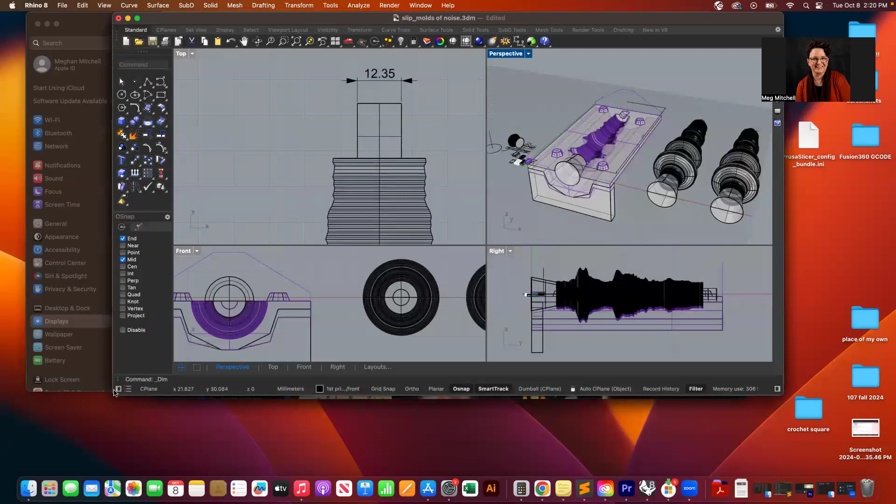I'm using Rhino 8, and I committed the sort of very common error of trying to use Rhino without connecting to Global Protect first. Wah, wah. But it's just one of those things.

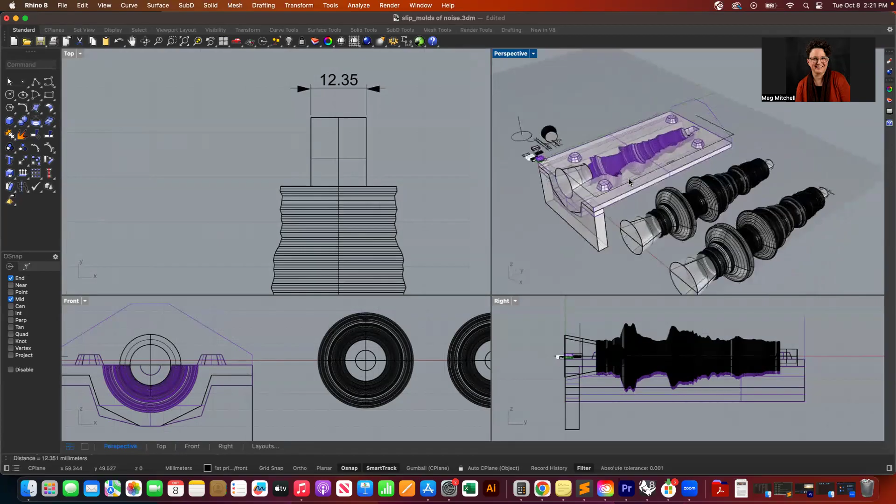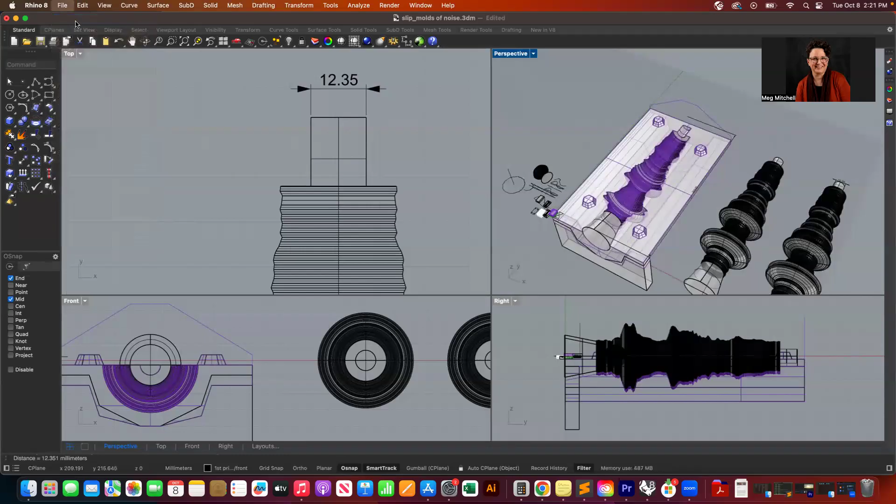So this is a file I'm working on in my own research, and I thought it would be a really good way to talk about how to get started with a 3D print. It's not really important what this is, because what I'm trying to do is make these forms so that I can snap them together. So today we're going to work on a couple of scale tests of this snapping part. Literally, we're going to make a box with a hole in it, and a piece that can slide into that hole. It should be fairly simple and basic. I can definitely do more demos on how to use Rhino in 3D. Most of you probably know about my YouTube channel, which might also be a good way to get some practice with Rhino. I have a playlist of about 7 videos with Rhino 7.

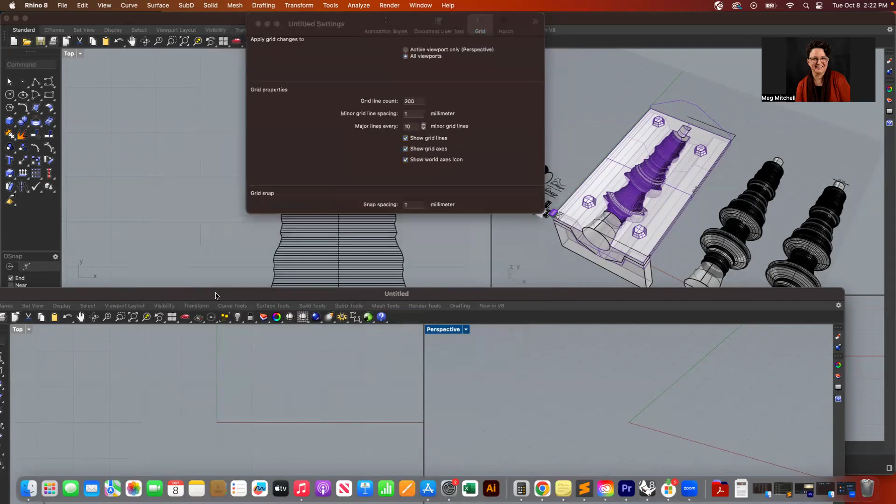So I just opened up a new document. The first thing I want to do is go to my settings. I'm going to work in millimeters, keeping in mind that the object I want to work with is about 12 millimeters wide, so I don't need hundreds of millimeters of space on the grid - just a pretty small grid. I think making the minor grid line spacing every millimeter should be okay, with major lines at every 10 minor grid lines. That seems completely fine to me.

I'm also going to check my units, making sure both are in millimeters, and they are. In general, 3D printing software really likes millimeters. It will print objects in inches, but it's possible you may have to do a conversion. If you designed your object in millimeters and want it in inches, you usually multiply or divide by 25.4 depending on which direction you're going. That's the magical conversion number. My advice for 3D printing is just to work in millimeters because it's easier.

This is really all we need to do to the grid at this point. As I'm doing this, I may change the grid a little bit to accommodate finer spacing. It looks like my snap spacing is at 1 millimeter, and for this project I think it might make more sense to adjust it, but it's fine - we'll change it later if we need to. Okay, I'm just going to go ahead and save this with a name. I called it 3D snap test.

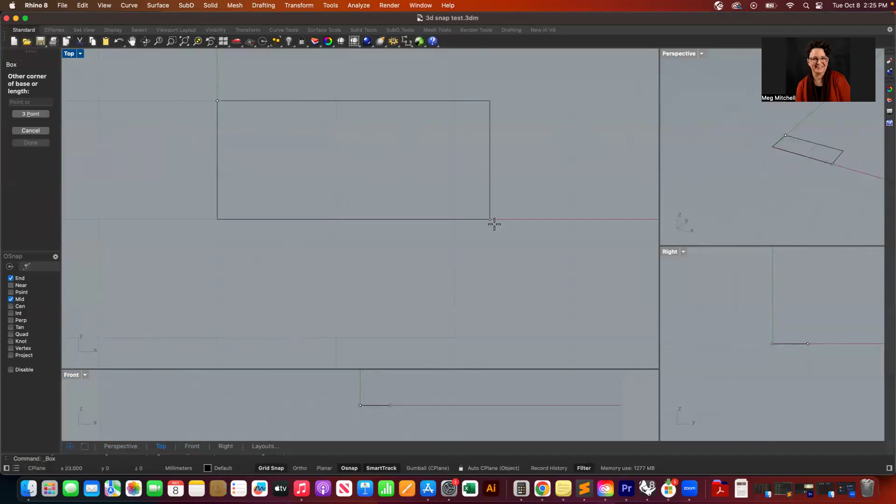So I'm going to start by making two forms. One I'll make while working in the top view, since I like that a bit more. I'm going to use the box form and make a box that's roughly 20 by 30 millimeters. To do that, I need to turn on grid snap, which was the whole point of spacing out the grid. I'm going to make that box about 20 by 30, and then probably about 15 millimeters up. I eyeballed it, but you could certainly type in 15 if you want to be precise.

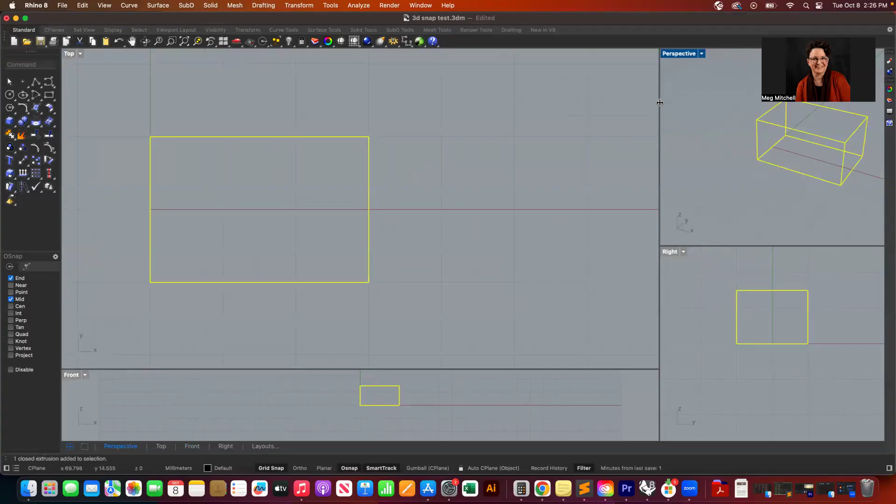I've got this box, and I'm going to show you another way to make a box, because we'll need a couple of little boxes for holes and rods at different sizes. Another way to make a box in Rhino is to start from the curve. What we did here is make a shape primitive using the box command - going directly to a solid box. If you start with a curve, there's a more complicated process and some things can potentially go wrong. The nice thing about using shape primitives is that they are guaranteed to be watertight. I'll have to show you a model that is not watertight in order to drive that home.

So when we make the second box, we're going to make it in a way that is basically wrong, or in a way that won't print. And then I'll fix it and I'll show you the difference.

Okay, so to start our box, I'm just going to do the same thing I did before, which is make a 20 by 30 rectangle using the rectangle command. And I think here I would go ahead and go to the surface menu and extrude curve straight. And then I can extrude it to the top level here.

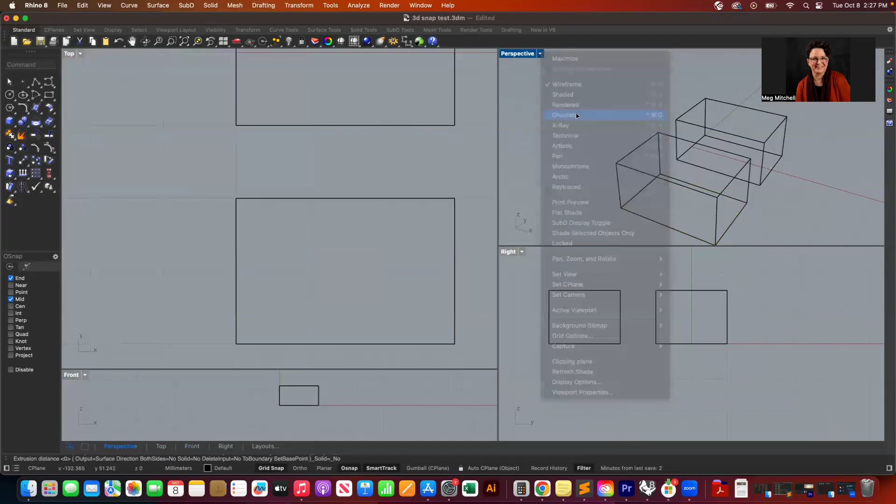Now I'm going to turn on my rendering in my perspective view so we can get an idea of what's happening. My personal favorite view when I'm using Rhino is to use the ghosted view, because you can kind of see what's inside things in case things have gone terribly wrong. You could just as easily use the shaded view, but for me, seeing a little bit of that interior is really helpful.

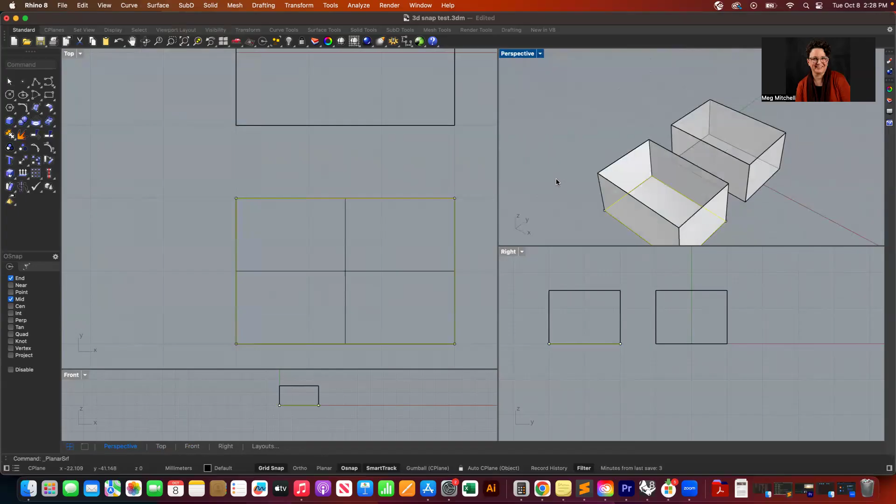So basically what you can see is that we took that curve and we extruded it into a surface, right? So it would be fairly easy to fill the bottom by making a surface that conforms to this curve. And that's over here in the surface menu, the surface list called planar curves. So this is indeed a planar curve, and it can just have a surface constructed around it.

Now I want to show you, first of all, which of these models is 3D printable and which is not. Yeah, the one that is fully filled in on all 6 sides is 3D printable. This, if you fed this to a 3D printer, it would literally print nothing, because the surfaces have no mass, and they are not what is called a watertight shell.

So now you may be asking, well, what if I wanted to print an open box like that? I would say, okay, we'll talk about that in a second, maybe after I do my rod things. But for now, I also want to show you another sort of way of making this not quite right.

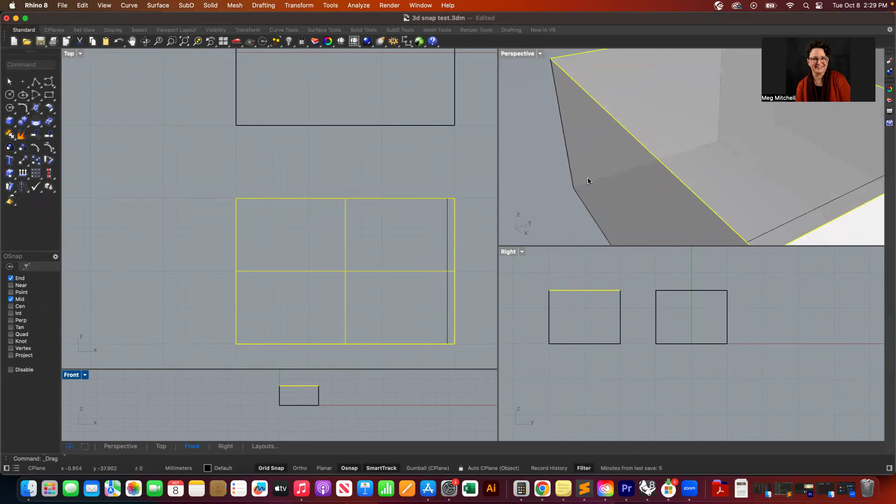And that would be, let's make a rectangle that goes from here to, let's say, here. And I'm just going to raise it up to the level of the other ones. Oh, I moved the wrong rectangle. Sorry. Move the right one. Okay, so now I'm going to fill in that surface by using the planar curves method.

Is this object 3D printable now? It is not. It's not. So this is basically an object that is like most of the way there, but it's not watertight.

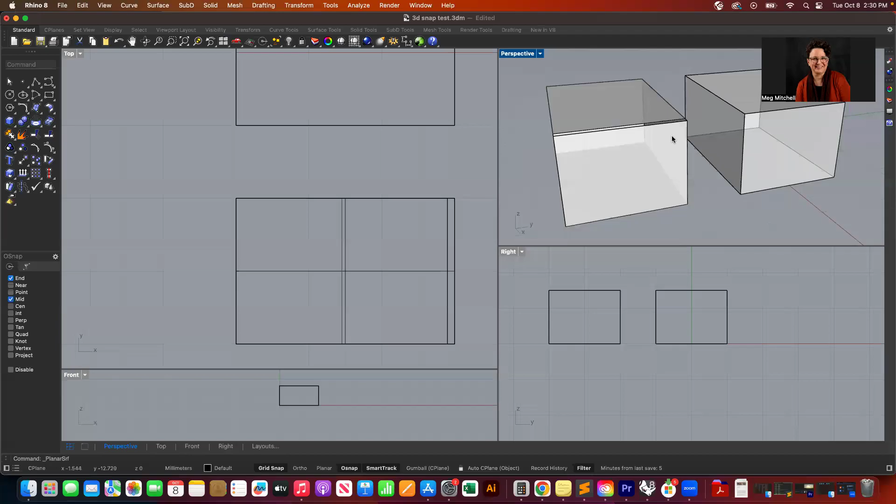Now, I think in this case, it's really obvious that it's not watertight, right? Because I made that gap pretty large. Where you run into trouble with Rhino is that this lack of water tightness can sometimes be beyond the seeing eye. Like it's so close that only the exporter can tell you that it's not watertight.

And so if you're having problems with water tightness, I will say a few things. Use your snaps. That is the best way to ensure in Rhino that things are watertight. If you're expecting to move something to another node or another line and you're not using a snap, I can almost guarantee you that that form will not be watertight. So definitely using the snaps and making sure that everything snaps together is the number 1 way that you can make things watertight. So this is easy enough to fix, actually.

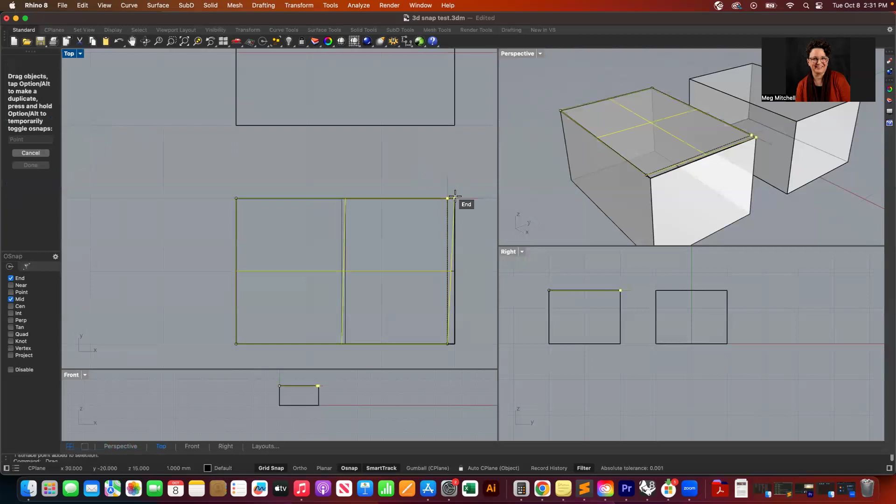I can just take this surface and turn on the edit nodes here. Where is that? It's right here, control points. And I can basically just take one of these points and move it over here, and take another one of these points. I could even move them both at the same time if I wanted to be really fancy. And there, now our model's fixed. So that's pretty much what it takes there.

So I'm going to go ahead and still keep using these two boxes. They're basically identical, but at this point, I'm hoping to have some forms that create holes inside of them.

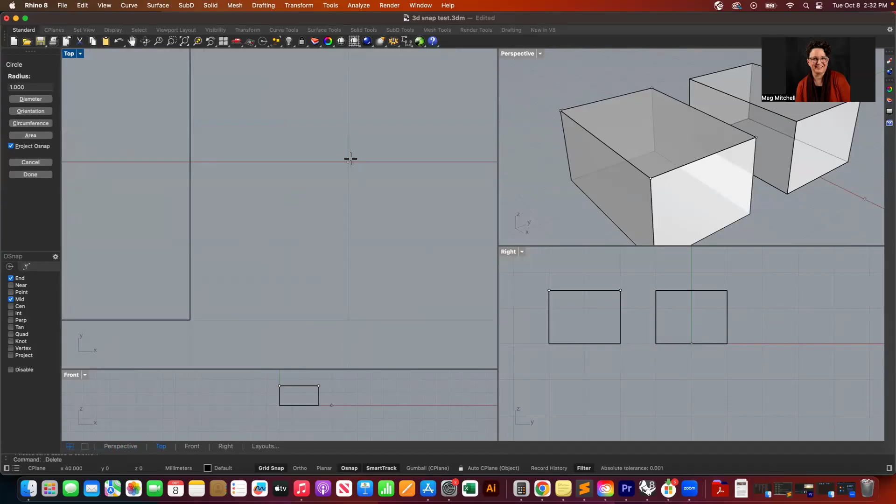And so I think what I'm going to do there is go ahead and make a cylinder. And I'm going to make it, let's see, I think I'm going to make it 6 millimeters to start. And I can certainly now extrude it to give it some height. So I can go up here to solid, extrude planar curve straight, and just give it some height. I want it to be a little taller than the box. And then I can just move it into the box.

I think I'm also going to take this 6 millimeter object. The issue with this kind of thing in 3D printing is if I print the rod at exactly 6 millimeters and put it into a hole that's exactly 6 millimeters, it's not going to work. It'll just bonk and won't go through. There's a tolerance issue because the 3D printer isn't accurate to the thousandth of an inch or whatever.

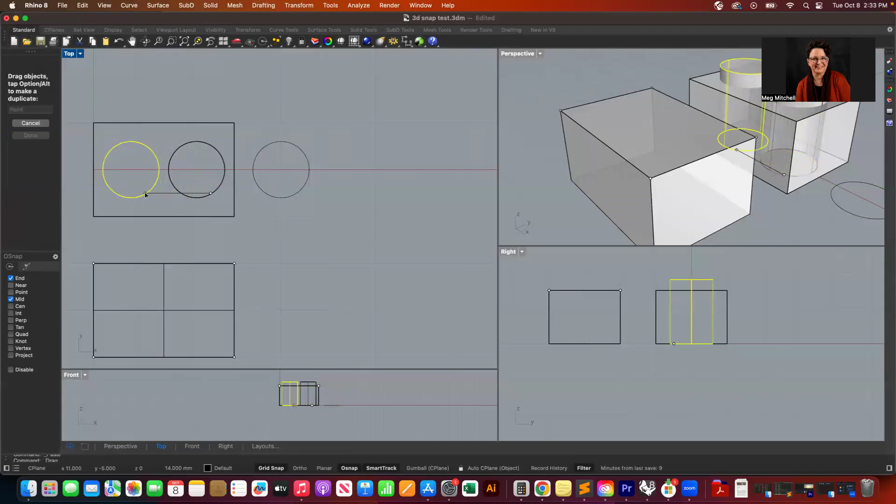So for that, I'm going to take this 6 millimeter rod and move it so that it's in a couple of different places.

We have to basically make our hole a tiny bit bigger. So I'm going to make a cutting object here that's a little bit larger, another cylinder in basically the same place as the old cylinder, but in a couple different sizes. This one is 6.7 millimeters.

I'm hoping that will be the largest amount of tolerance, but I think I could make one that's also like a half step between, so I'll go ahead and make yet another circle.

This is where I thought maybe my snaps needed to be a little more nuanced, but I think I can get away with doing a midpoint here. Whoops, excuse me, that didn't work out so well. If you're having trouble using your snaps, like right now it's not 100% snapping to the midpoint because it's too focused on this endpoint. So I could turn the endpoint snap off, and that kind of forces the issue.

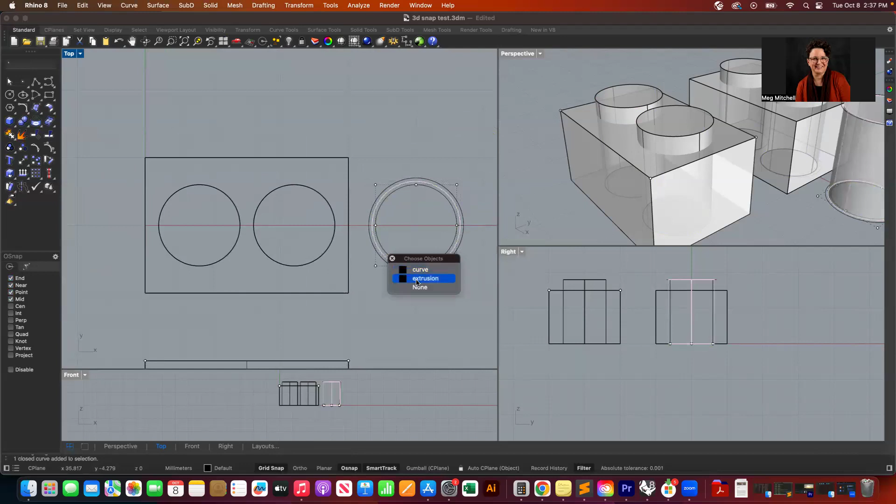Actually I got a tiny bit turned around just now. Hang on, okay. So this is our first form. I actually want the extrusion, not the curve. I'm going to hold the shift key down because I'd really like to move this in a full ortho mode here.

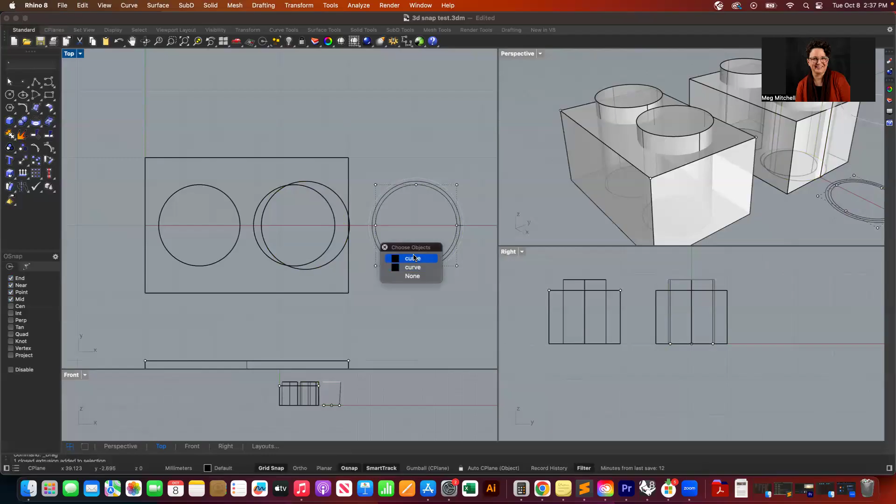As you can see, it's kind of snapping back and forth, so we can fix that later, but I want to go ahead and get these moved into place. This one needs to be extruded, so we can extrude this one down. Yay, and now I can move this extrusion over here.

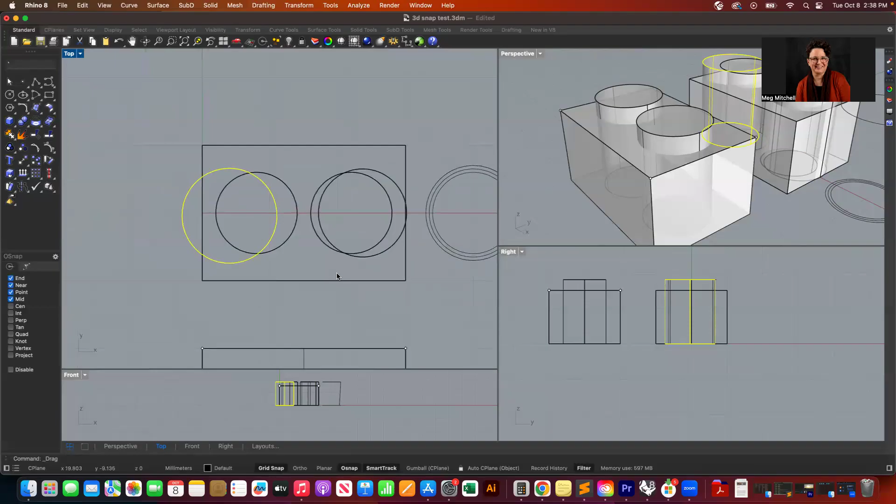I'm just putting them in place so I have some idea of where they can go. Then I'm going to use the actual move command to precisely move them over the other ellipses. So here, I'm going to take this one, use the move command, and activate the center option, trying to move it from center to center.

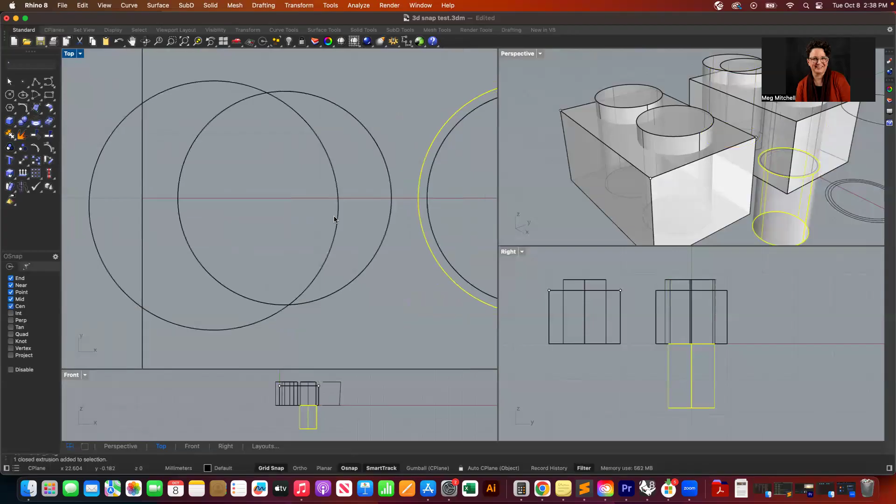I think that's exactly where it should go. I'll do the same thing with the other one, again with my center snap activated, so I can go to the move command, pick up the center of the large one, and then move it over the center of the little one.

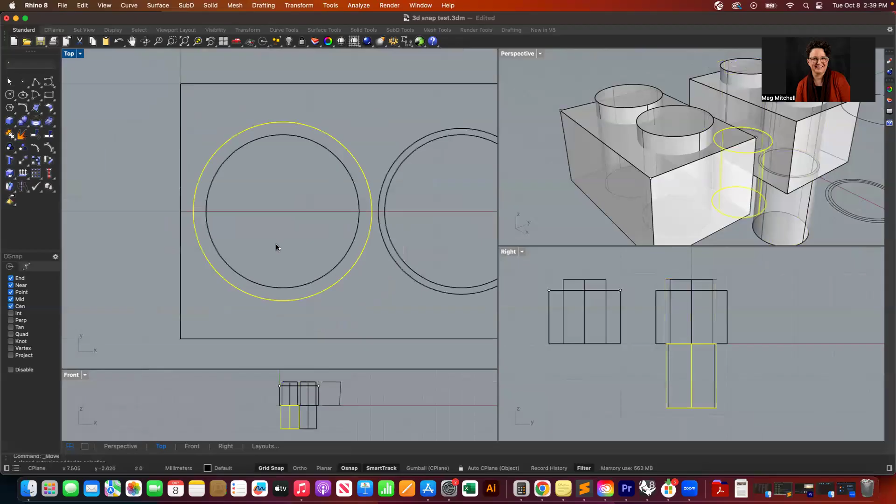Yay, okay, so now what does that look like? Right now it looks like I have to adjust them a little bit in the Z dimension. This would be a good opportunity to use the layers palette, because these rods right now are purely decorative — they're just there to be there. I don't know exactly why, I think they were there mostly just for placement.

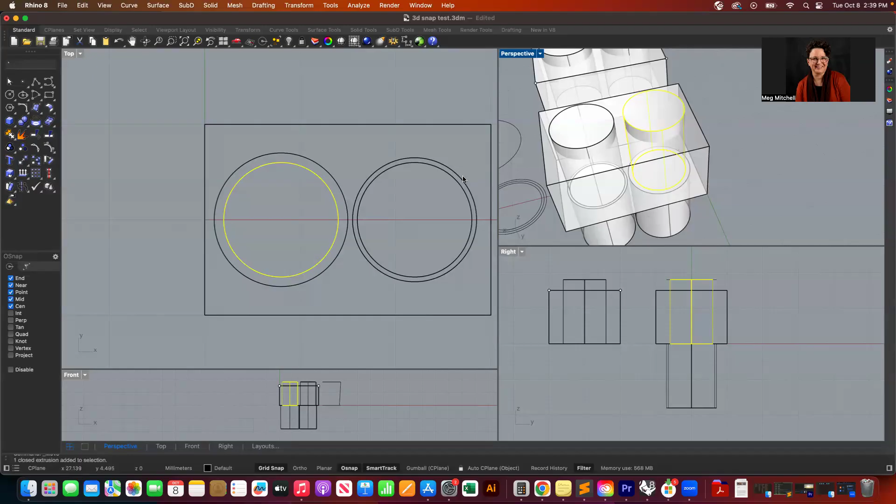So I don't really need them right now, and they're not really helping because the holes are going to be these larger curves. Also, just for the sake of time, I'm probably going to stick to these two and see how that turns out, and then I can do the rest on my own.

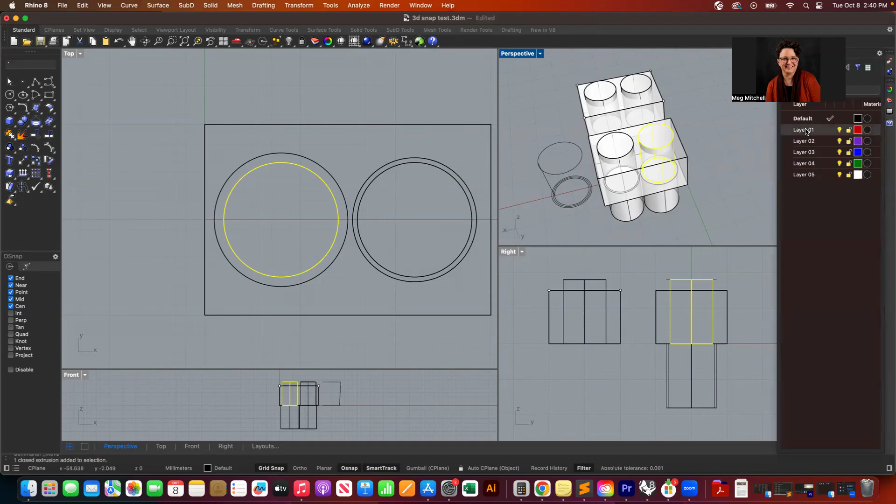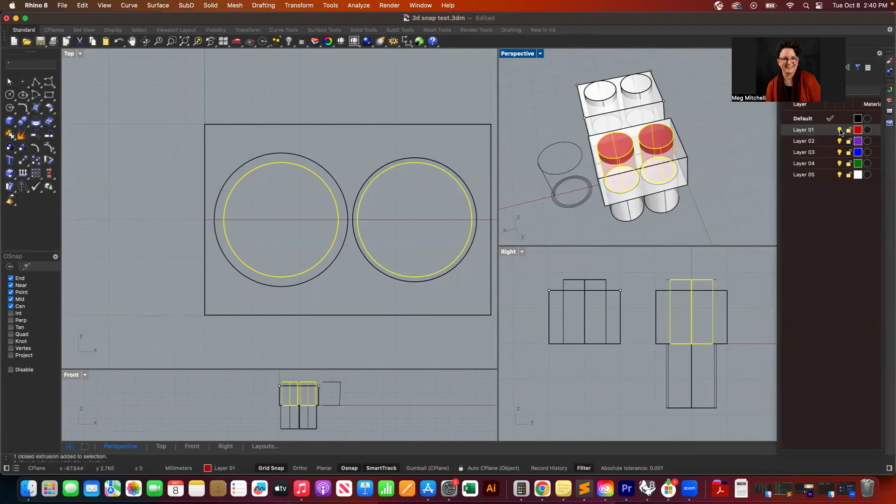So I'm going to bring up the layers, and I'm a huge fan of using layers in Rhino. I think it's a great way to sort of get rid of stuff but keep it where you need it. So I'm going to select these two things, go to a new layer, right click or control click, and do change object layer, which is basically going to put these guys on the red layer, and then I can get rid of them.

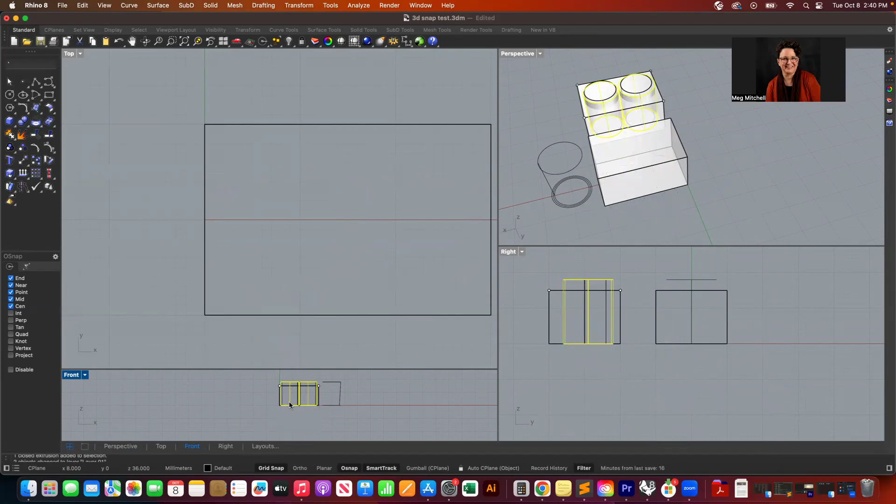Now, I do need to take these two hole objects and pop them up to the level of the other ones. Hopefully I can do that without moving them in the XY dimension.

Another thing I'm going to do, just because they're kind of interfering with my snaps, is get rid of these two for sake of simplicity. That'll make these easier to move into the proper place. Now if I hit shift, it will keep it in ortho mode, which is ideal because I don't want these to shift in the XY dimension, since I just took great care to place them in a certain spot.

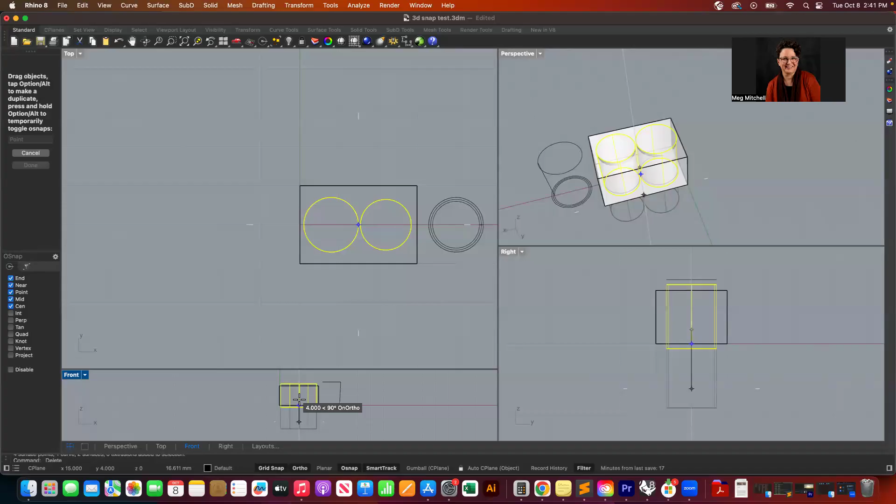Okay, so now I want you to notice that I'm moving these forms so that they overlap both sides of the box. You could have them flush to one side of the box and still make a hole, but it works better if it fully contacts the box. Okay, so I'm basically good now.

Now what I want to do here is take these forms and subtract them from the box. So in Rhino, there's a set of operations called Boolean operations. Basically, you can take one shape and subtract another shape from that shape.

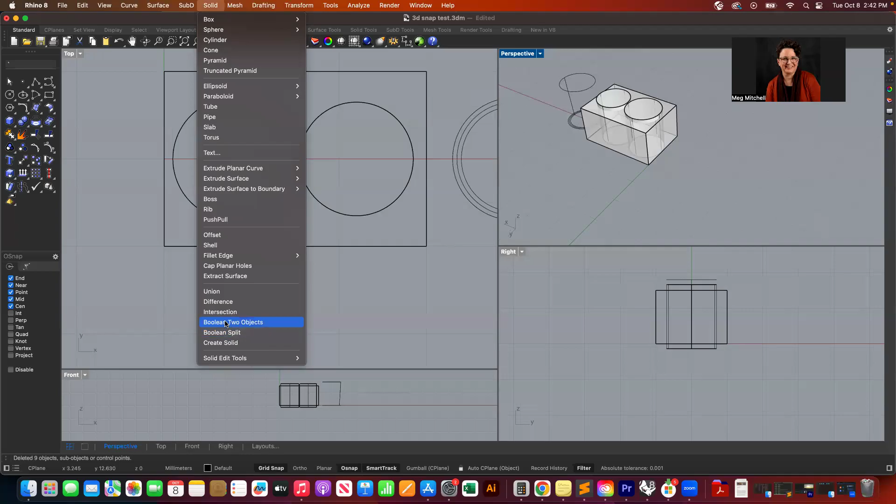So I think what I'll do here is go to the solid menu and Boolean two objects. I personally like the Boolean two objects function because it lets you browse through all the ways of subtracting or intersecting rather than having to just pick one. There are some reasons you would choose these other methods, but they're sort of encompassed in the Boolean two objects method. So here it says select two objects to Boolean.

So that would be the box and let's say hole one. You just click until you get the result you want. It'll show you a couple different ways of subtracting or adding these objects together. And then you hit enter. And so now you can see we have a fully holed out hole.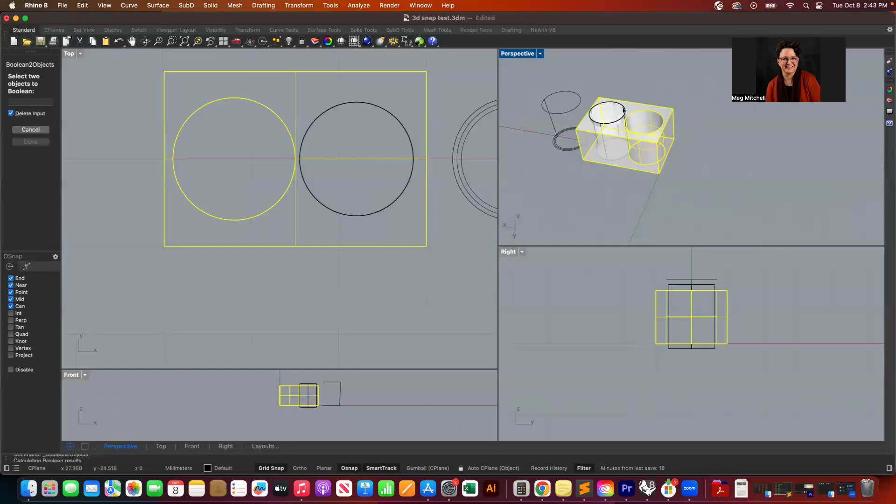And then we can certainly do it again for the other hole. So in Rhino, a good hack: if you hit enter, it will bring up the last command you used. So if you're doing something repetitively over and over again, hitting enter is a super easy thing. So I'm going to select these two objects and click through my options. Yay, thank you.

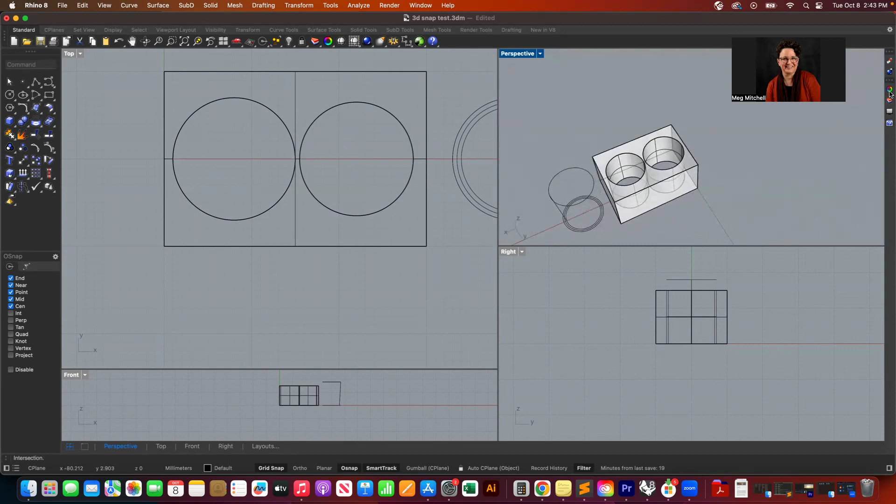If I were doing this on my own, I might consider making this have a little bit more real estate here. This is going to be a little thin, but it'll be fine. It'll definitely print just fine. And I'm going to go ahead and bring my rods back into the mix.

So basically, right now, we could 3D print this, and it would print as one model but three separate objects. And I think that's what we're going to do. Can I guarantee that these rods are going to slide around in these holes? No, I can't. I mean, it's a test. But that's the kind of testing you have to do if you want stuff to fit together.

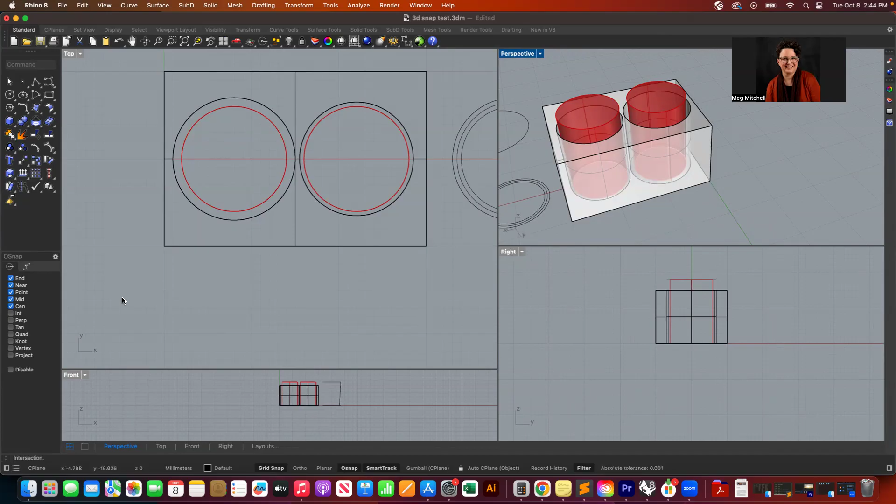So I did want to show you one other thing in Rhino that might be kind of useful, and that is the shell command. So if, let's say, you wanted to print a box that was hollow, I'm just going to bring back our old box from before. You can certainly do that.

So there is a command in Rhino called the shell command, and I'm actually not sure where it is - I always just type it into the command line. It's called shell, so if you type the word shell, it'll come up. Then it says, okay, select a face to remove. This thickness parameter is the wall thickness that you're going to get.

So we might actually want to go for something a little thinner, like maybe 0.5. That would be really slick.

Elena, what's the thinnest wall thickness you would do? I would say probably the thinnest wall thickness you could reasonably do. At a certain point, the printer just isn't going to be able to print it. I would say like 0.2 millimeters, whatever your layer height is, is what I would make your thinnest wall. Right, because the printer has a nozzle that's a certain size, so you definitely can't go less than that. It really depends on what you're printing.

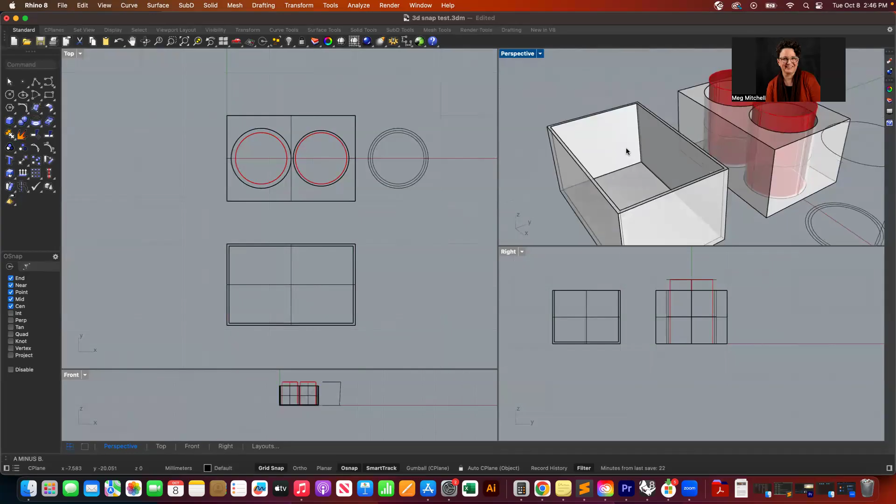So this has been shelled out now, and this form is completely 3D printable because it has a solid surface that goes all around it. So that surface-to-surface thickness can be quite thin, but there is a practical limit.

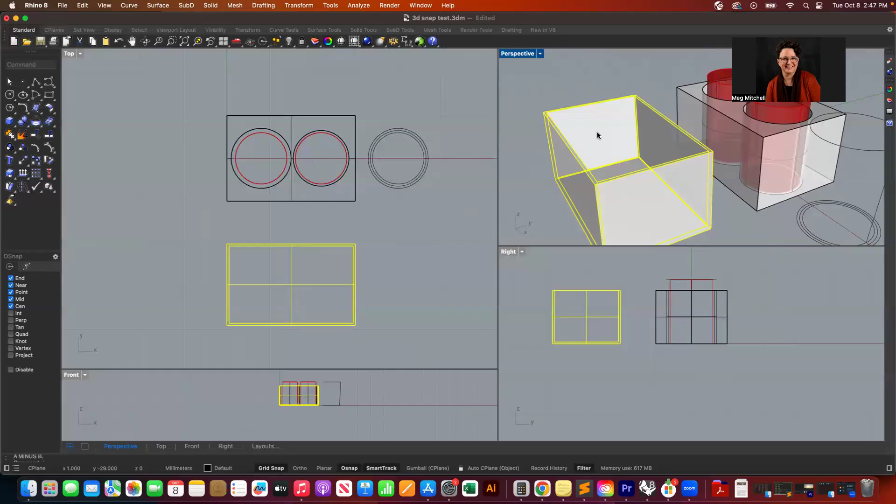Awesome. So now I'm going to show you how to export this and get it into Prusa Slicer. Before I abandon this model, I'm going to do a tiny bit of housekeeping.

I'm going to take these curves that I had made before, select them, and this is something I do repetitively in my own work. I make a layer called curves, and I just throw stuff on it by doing a change object layer, and then I even make it invisible. I mostly just store those curves in my Rhino file, because if I go to make the surface a different size or whatever, they're there and I can use them again.

I don't like doing things twice. So now we've got some objects on the screen. Let's say I wanted to have these three objects be my 3D print. It's pretty typical when I work in Rhino for 3D printing that I have a ton of stuff on the file, but I just want to 3D print this one thing. So there is an export selected function in Rhino, which is super helpful.

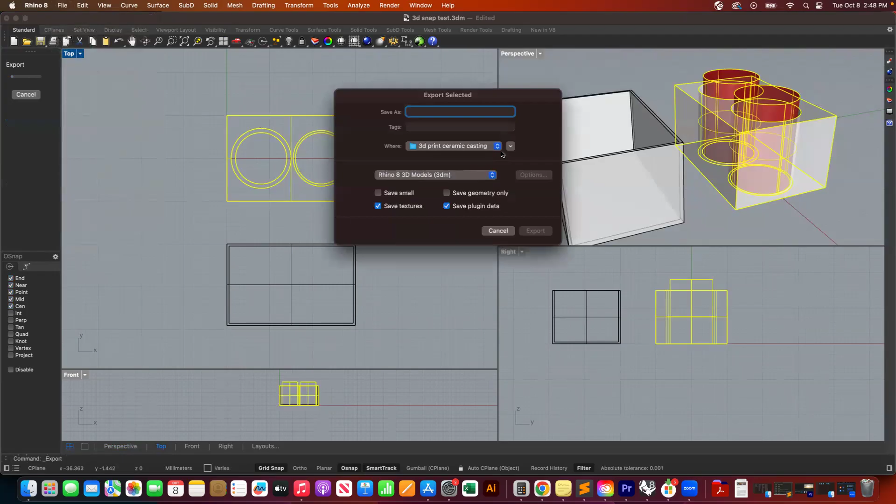You can go straight to that. So I'm going to save this in my class folder, and I'm going to export it as an STL.

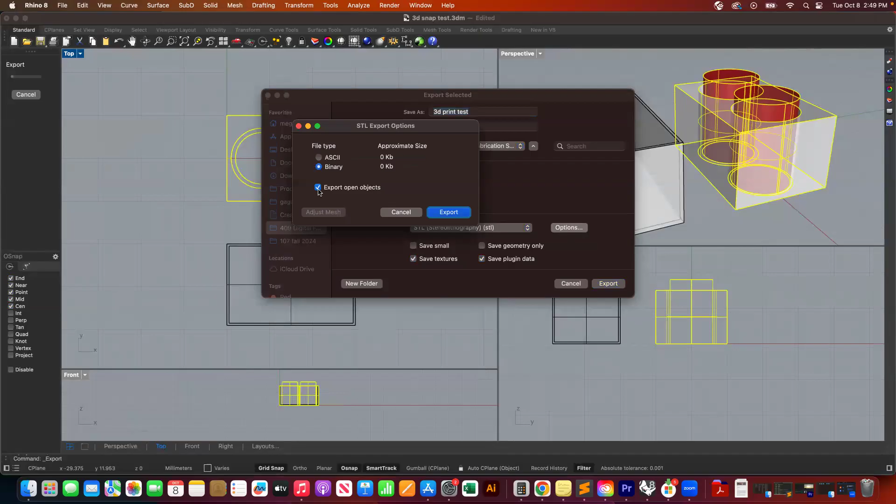Now there's an options palette here. Honestly, I don't think any of this matters much, but you probably want to have this box checked that says export open objects. The only reason I say that is you might think, oh, that's bad to export open objects because they're not 3D printable. Well, they might be — 3D printing software has gotten a little more forgiving over the years, and sometimes you can get it to work. So I just enable that, so if there's some teeny tiny problem, sometimes the software will just gloss over it.

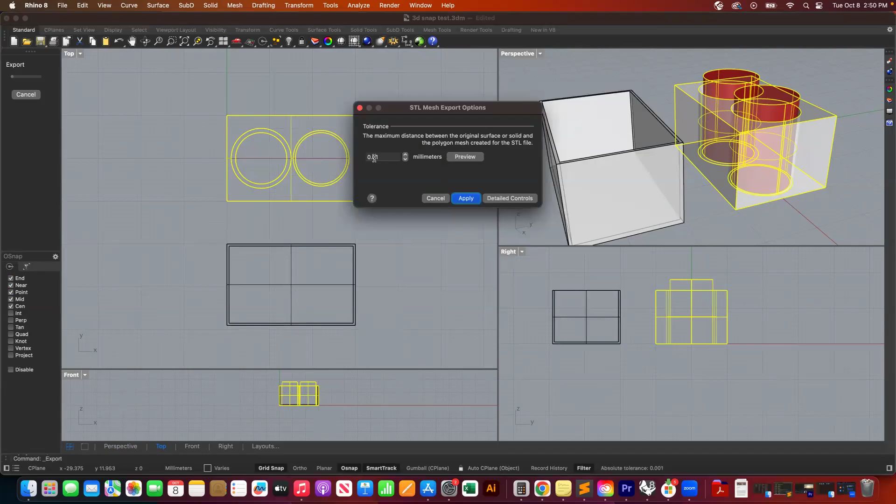So then you can export. There's a setting here for tolerance. Certainly if you're working on an engineering project and need a certain tolerance, I'd be mindful of that, but for general purpose 3D printing, this is way more than you probably need — it's like 1/100th of a millimeter. If you worked at 1/1000th of a millimeter, it would just increase your file size. I don't feel like 3D printers are capable of representing that level of precision, so you're just wasting hard drive space.

So you can go ahead and click apply and then finish the export.

Okay, first I'm going to preview my STL file. I might have told you all about this program called MeshLab — if you just Google it, you can download it. It's a free polygon mesh viewer, and it's really great for checking out 3D models before you print them. You can actually do some things to it if you're using a 3D scanner; it's really great for 3D scanner data, so it's definitely something to think about.

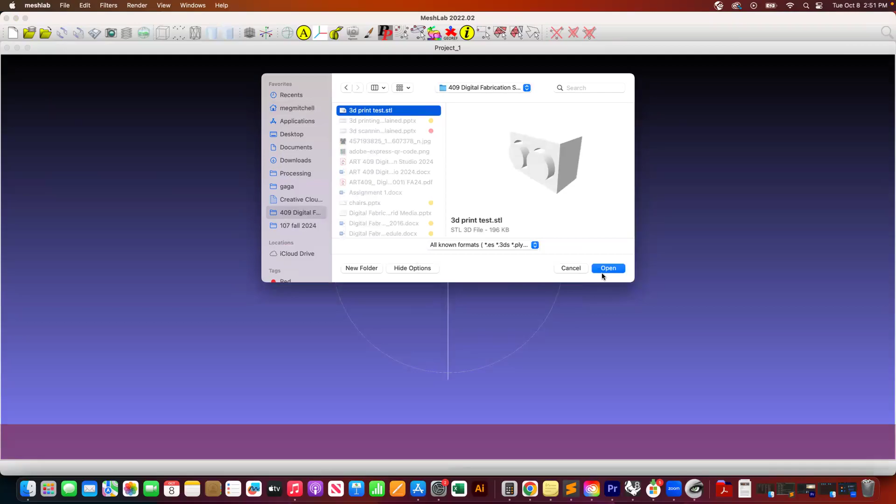So I'm going to import the mesh. Where did it go? There it is. Just go for the defaults there. And so as promised, we can kind of see our little test here.

MeshLab is really, the reason I like to use it is because — is that Aaron McAdams? Oh, hi. Hi.

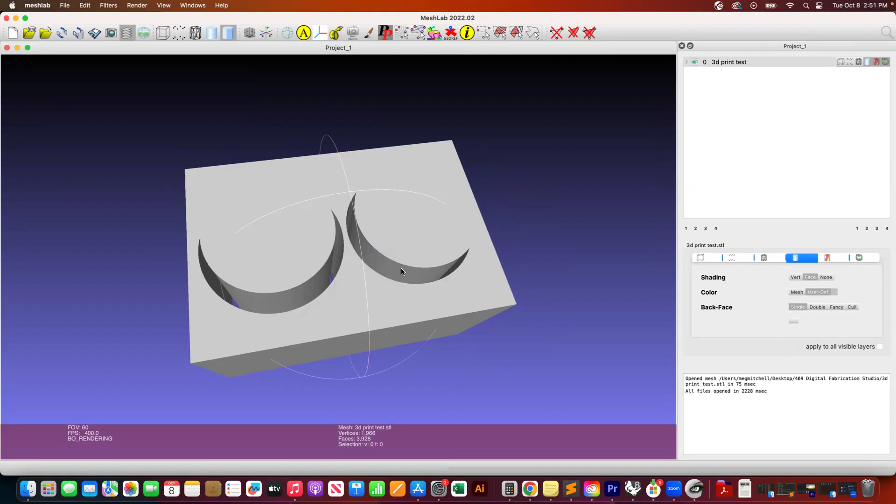The reason I like to use MeshLab is that if you've got a bunch of 3D printing models, Rhino takes forever to start up, but MeshLab is like, hello, I'm here, I'm going to show you your model — it's light and easy. So anyway, I'm basically verifying that it exported correctly and that all of its holes are in the right place, blah blah blah. So now I can exit out of this.

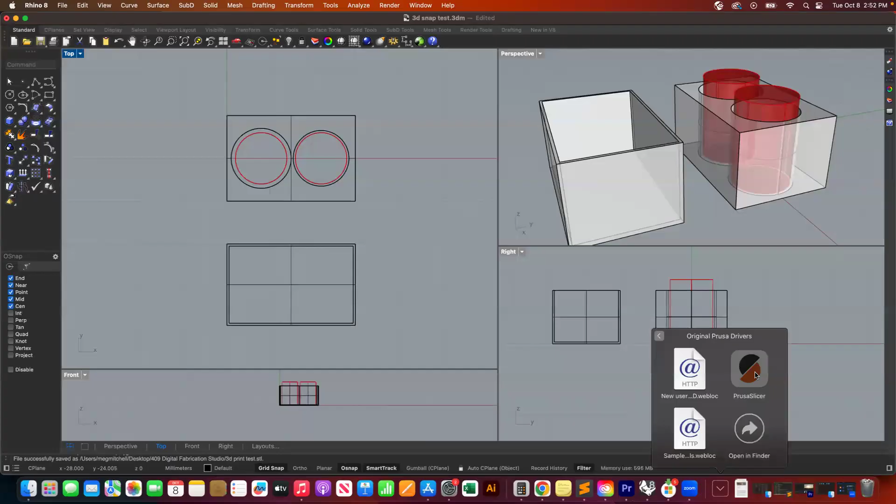Now I'm going to open up Prusa Slicer, which is basically what we are going to use in this class to get us from a 3D model to instructions for the 3D printer. So when you start Prusa Slicer, go ahead and maximize it here — maybe not that much, sorry, hang on.

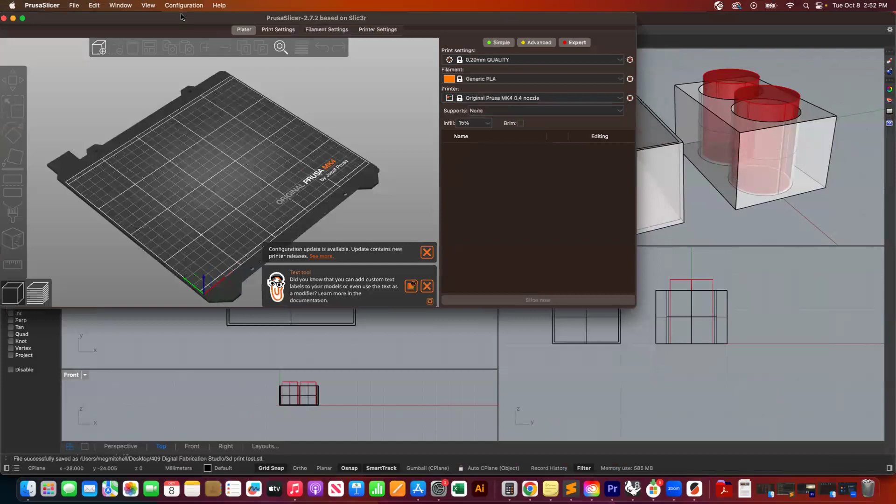Okay, so basically when you open up Prusa Slicer, you get this. And I think from here, you can add a model. So I'm going to go ahead and just find my little model here.

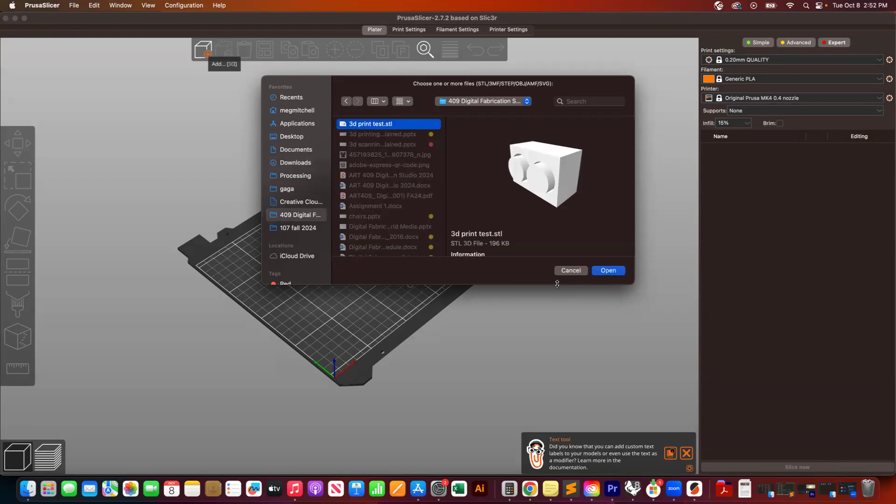It actually brought it in the correct orientation, which is kind of surprising. It usually doesn't. But the best way to change the orientation is through these rotate tools. You could just grab the wheel and rotate it to wherever you want. If you click it, it snaps to 90 degrees, which is nice.

But we don't really need to do any of that. There's a bunch of other stuff going on with Prusa Slicer that I think we'll get into over the next week or so. But for now, I think we're just going to make a print and keep it pretty basic.

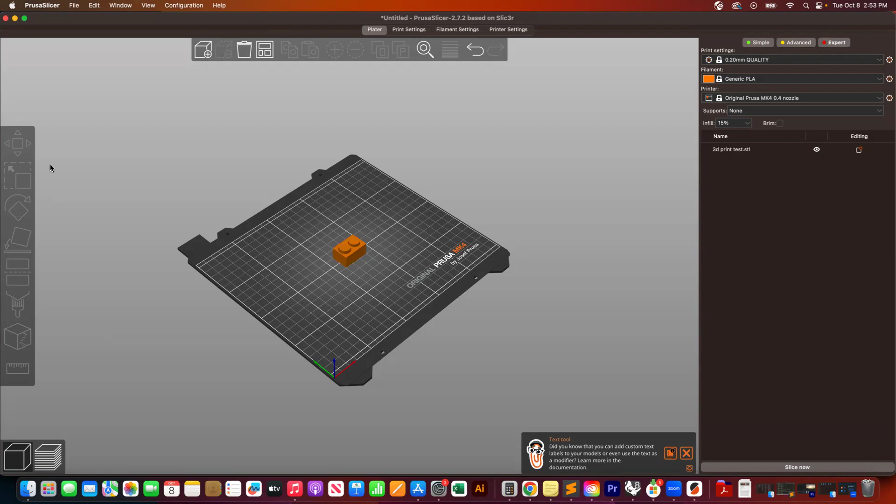The first thing you might want to think about is just verifying the dimensions of your object. So if we click on the object and look at it over here, hey, guess what? It's 30 by 20 millimeters and 18 millimeters on the Z, which sounds absolutely perfect. So checking the dimensions right away is a good thing, because if you get down the rabbit hole without checking them, it will cause you further problems.

So we also have a variety of settings. Now I'm just going to move this down here for now. We're in the plater view right now, and the plater view is basically where you can see your 3D print to be in a human viewable form. So it's like a 3D shape, right?

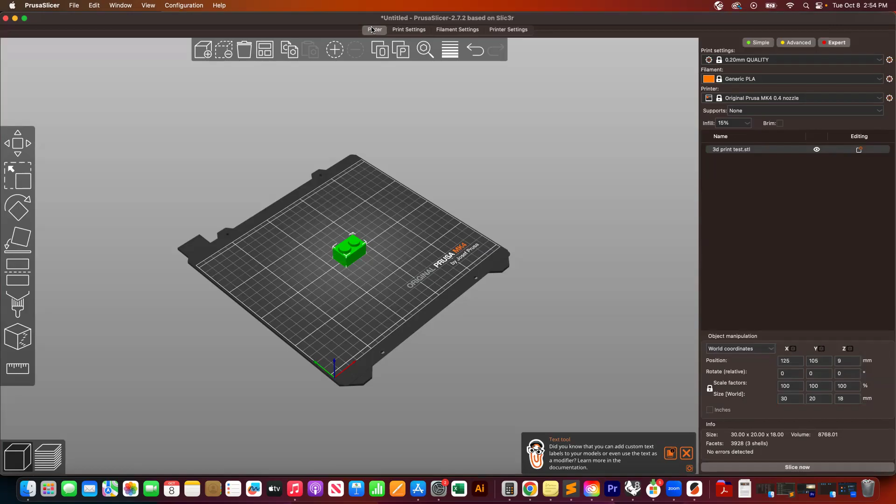If we go to the other view, which is the sliced view, you'll get cross sections of it when we generate the G code.

So over here on print settings, I mean, we could talk at length about print settings. And as you can see, there's quite a bit going on here. There's all kinds of tabs in here. And to be honest, it's quite complicated.

What I think we can do to get everybody started is give them a config file that represents settings that we would recommend. So I've gone ahead and am using that config file, going for like a 0.2mm quality here. On the filament, I'm using the generic PLA setting. And on the printer settings, I'm using this original Prusa with the 0.4 nozzle. The big orange box is my printer in my studio, so I have my own profile for each printer.

Okay, so getting into the print settings, there are certain print settings that matter and certain print settings that you could argue about like how many angels could dance on the head of a pin. The print settings that really, really matter are layer height, infill, and speed, I would say. And then there's other important stuff, but we'll get into that as we need to.

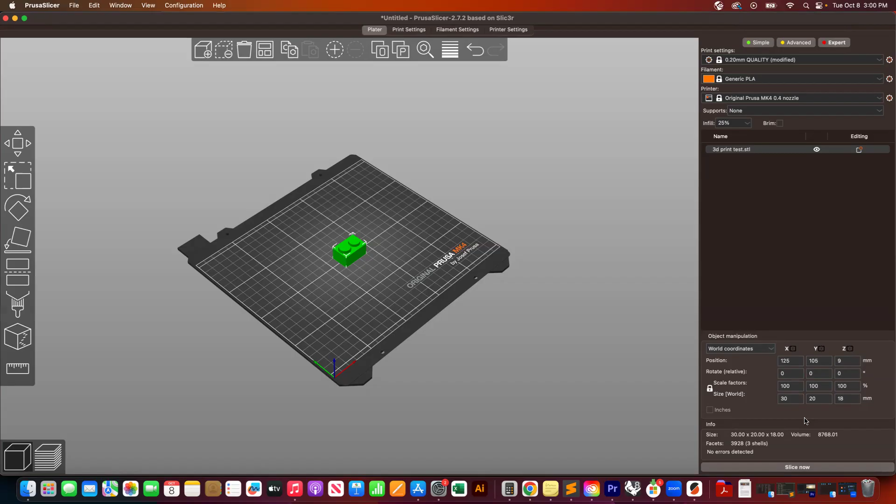Okay, we're ready to go. I want to print, so let's go ahead and slice now. Slicing basically generates the layers of machine commands, okay.

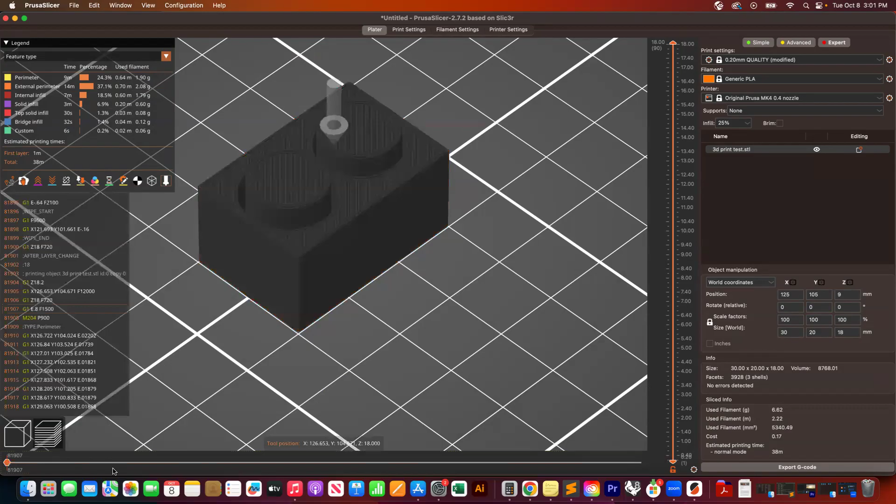So now that we've sliced, I'm going to zoom in here and show you what's going on with the slice. One of the cool things about Prusa Slicer is that you can really navigate. If you go to this preview view, you can navigate through the different layers, basically through the entire thing, and that can be super fun. It also gives you a really clear way of seeing where your different types of paths are, and I'm sure you can imagine you can get super nerdy with that.

Okay, so we're not going to do that today. So let's export the G-code, and I would definitely consider putting this on a flash drive. Prusa Slicer gives you a pretty elaborate name for your G-code, and honestly I think it's kind of helpful, because if you change the printer settings it has a really big effect on your file. So you can just look at the file and say oh, this is the 0.2 layer, or this is the 0.4, or whatever. So I'm going to go ahead and save these to my directory here.

And I'm going to grab a flash drive.

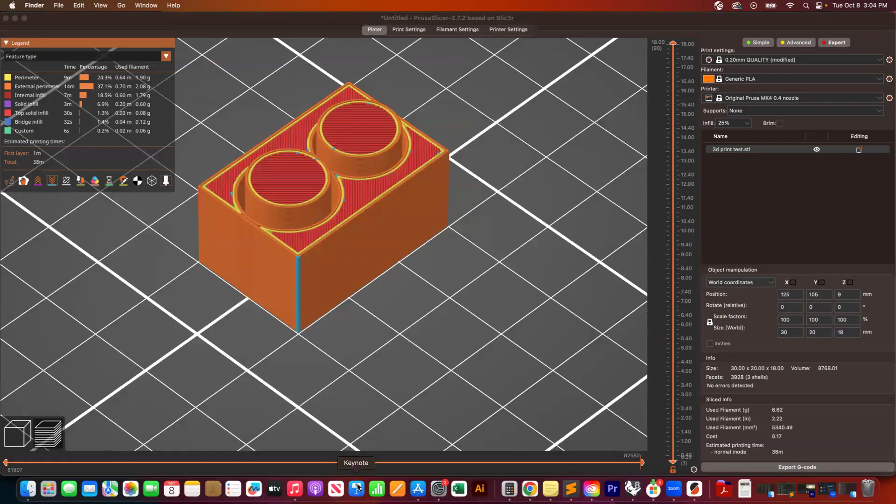Okay, so basically, I think I'm going to turn the recording off and we can move over to actually print this thing.

I will see you all in a minute. I'm gonna decamp here.